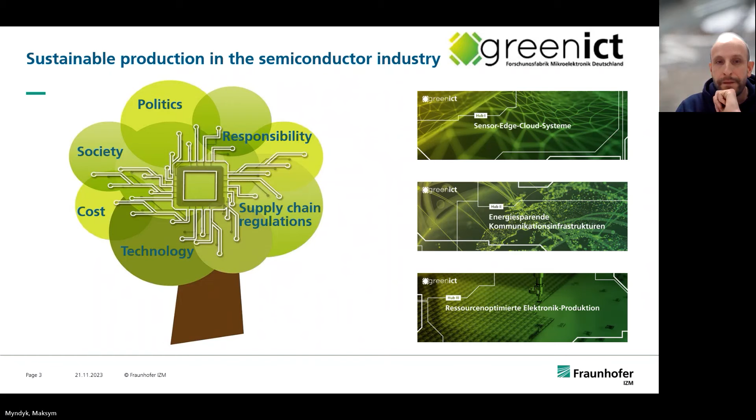And in this project, we started to look at what kind of material we can substitute, what actually means a hazardous material for us. And we reviewed all our processes. I have to mention that I belong to the back-end of line metallization group.

So here we have the plating tools, we have CMP, we have tools for wet etch and strip processes, and one of the processes is cleaning, cleaning of 200 and 300 millimeter wafers. And after this critical look into our processes, we found that one material actually looks very good, but it's not really fulfilling the HSE requirements.

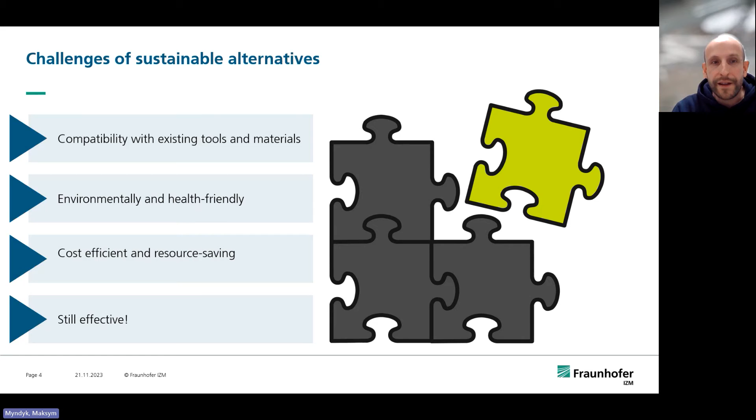And we started to analyze it, and the material that we are using for TSV fluoropolymer removal is called EKC 265 from DuPont. And why is this material not good enough? Actually, it performs very well. It does what it's supposed to do.

But the components or additives used in this material are pretty hazardous and also classified as carcinogenic under REACH. It does not fulfill the sustainability requirements at all. So we decided to find a substitution in this particular case.

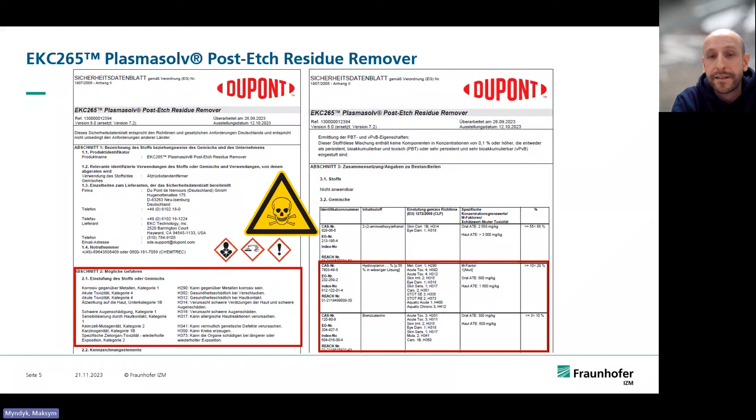And after some research, we connected with different chemical suppliers and vendors. We found a material called D-BOS 390 from Technic France. And they also published some results, but the results they published were done on the coupon level. And we wanted to prove whether this material also performs so well on the wafer level.

By the way, they claimed that the material has a dual function: it could remove positive photoresist, it could also remove the fluoropolymers, and it's also confirmed from the safety point of view. And about the stability, they say about 8 hours, but let's check it.

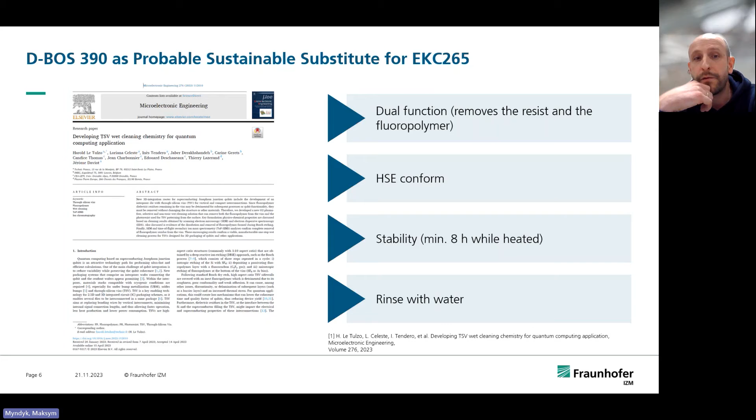And what is also very important, the wafer processed using this material could be directly rinsed by water. And that was a strong argument for us to test it. So far so good. Let's see what the SDS data sheet looks like. We internally reviewed the technical data sheet, and we do not see any hazardous components here in comparison to EKC materials.

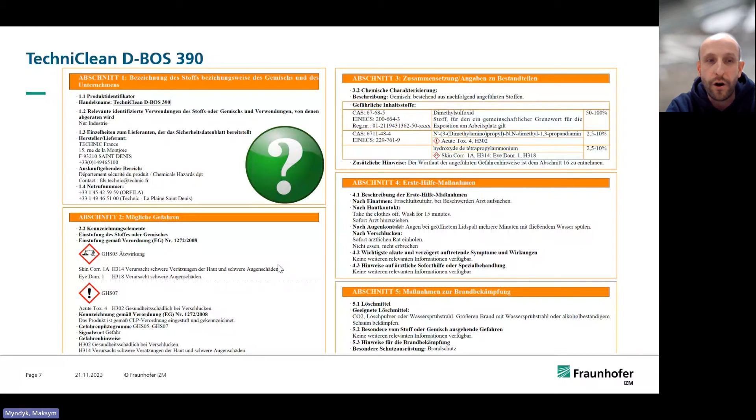But how does this chemistry perform on the wafer level? Could it really remove all the fluoropolymers? These were still open questions. And before we go to the TSVs, let me describe who we are and why we need the TSVs.

ASSID, it's an All Silicon System Integration Dresden Institute. Our core competence is in the packaging. So we are producing the interposer, 2.5D or 3D integration, heterogeneous integration. So we integrate passive and active devices on the interposer. We can work with a wafer, we can work also using the polyimides.

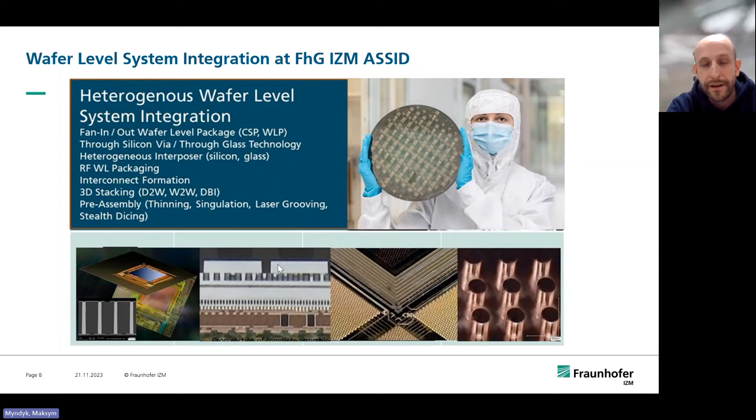But to create an interposer, something important is needed. And this important thing is the interconnections for heterogeneous integrations. And these interconnects, you can see there, these pillars. These are vias or the TSVs etched in the silicon wafer. But to get them, the way is pretty complicated.

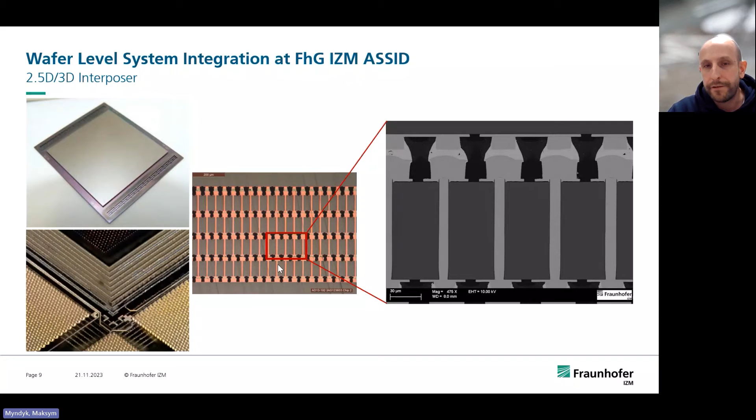To receive them, we need to apply a special approach, so-called plasma etch, and the most widely used is called the Bosch process. And I will very briefly describe what the Bosch process is. Probably all the participants know much better than me, but by the way, in the Bosch process, we have a cycle of 3 very important steps.

In one step, fluoropolymer will be deposited on the walls. After that, the fluoropolymer will be anisotropically etched from the top. And the third step is an isotropic etching of silicon using the SF6 plasma gas. And these cycles repeat all the time. And using this process, it's possible to etch different dimensions or geometries of TSVs.

But after etching of TSVs, the walls of TSVs are covered by this fluoropolymer passivation layer, covering from the top to the bottom. And this layer is there to protect the walls from isotropic etch to get these nicely etched vias. But after etching, the polymers need to be removed. And why do they need to be removed?

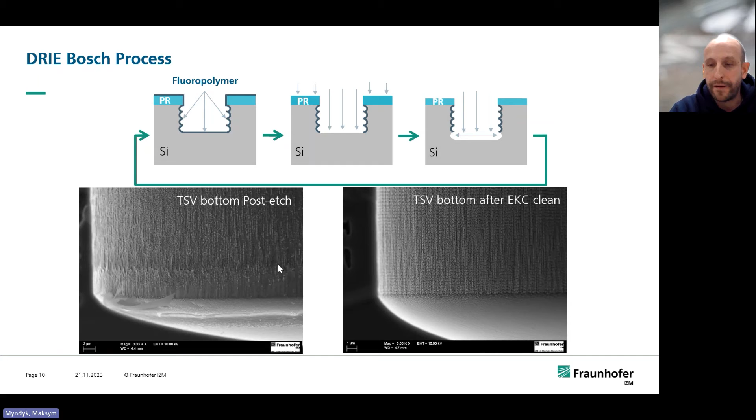First of all, the fluoropolymers have bad adhesion to the silicon surface, and they can peel off anytime. Additionally, when further steps happen, like a silicon dioxide CVD or metal sputter process, the whole system can fall down, so it can delaminate. It could lead to higher thermal stress. It could lead to electrical malfunctioning, failure. So the clear answer is it needs to be completely washed away.

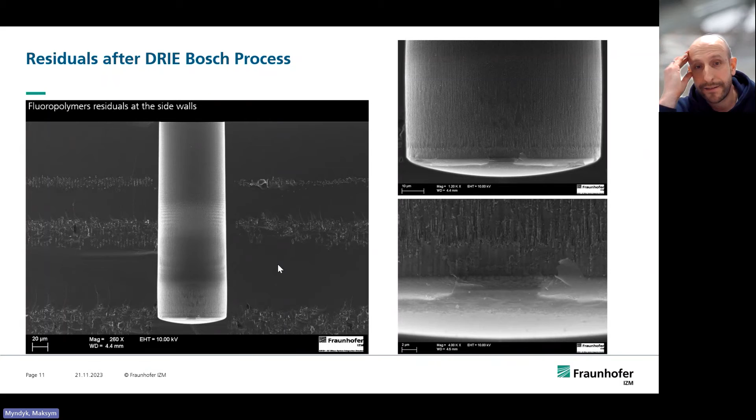And the picture of a not cleaned TSV is very easy to identify. We do not see on the bottom any clear scallops caused by the Bosch process. And everything is covered by the fluoropolymer layer. And how this layer needs to be removed, I will explain in a few minutes.

And this is another example of how the fluoropolymer layer is peeling off from the TSV walls. And on the bottom, there are also a lot of residuals. And for example, if everything is covered by the metal, it could simply just delaminate.

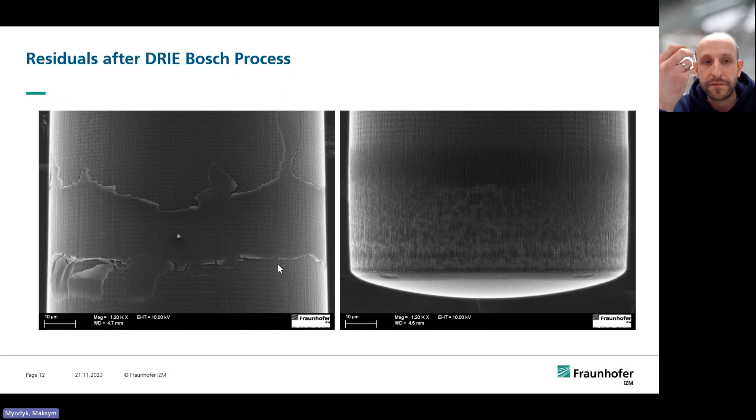For cleaning of TSVs, we are using our existing tool, because the challenge is to find something new, but this something new has to fulfill the requirements. First, we don't want to change anything in the equipment. So we're going to use the same equipment, but we want to change the chemistry.

So here we have the in-house existing SSEC cleaning tool, and basically the cleaning step consists of immersion into the soak station. It takes some time, let's say 35, 36 minutes, and after that the wafer will be rinsed by chemicals again and rinsed by isopropanol, because the water cannot contact EKC directly in this particular case.

And in the third chamber, we will finally rinse by water and use megasonic power energy to remove all the particles, and the wafer will be dried by nitrogen. This is the first method we're going to use in our testing.

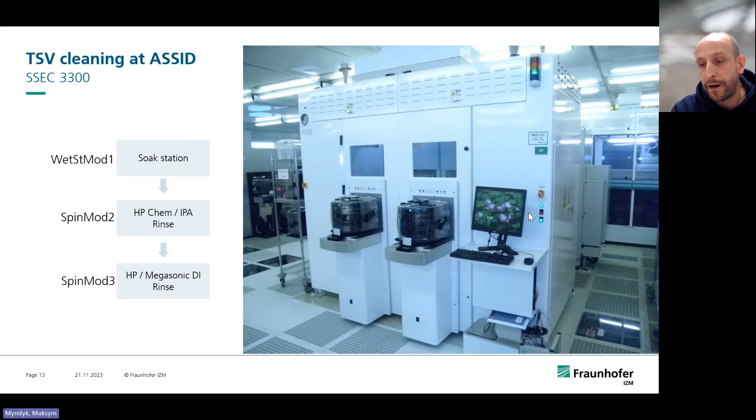Another technology approach is so-called MegPie. And for MegPie, we have contacted an external company. This process is patented. And very briefly, I will describe this. The idea is completely different in comparison to SSEC.

Using this triangle, we will apply megasonic energy into the wafer surface, and the megasonic energy is much higher in comparison to SSEC. But the energy will be transferred through the fluid layer into the wafer surface. And in both cases, SSEC, our existing tool, or MegPie technology, we will use the same chemistry from Technic France, D-BOS 390.

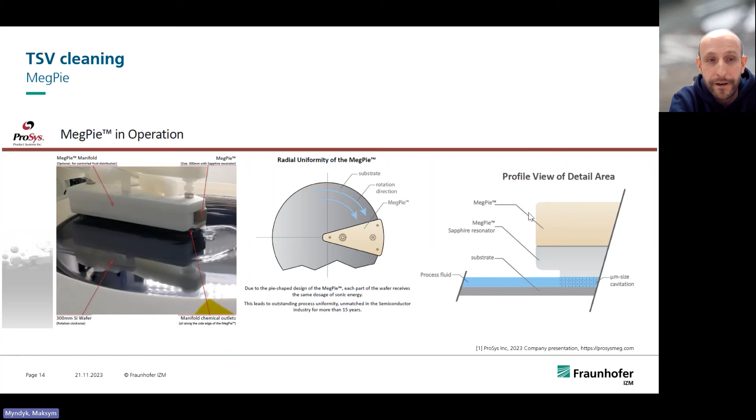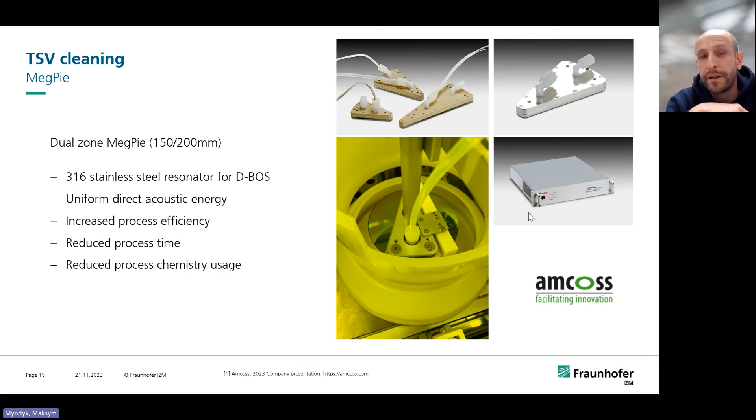The idea of MegPie was realized by, again, an external company. They have built the tools for handling of 200 and 300 millimeter wafers, and all the demos were done by them. They also claim that using this technology, it's possible to reduce the process time and also use lower temperatures. So far, so good, but let me go to the most interesting part, how it actually performs. Does this chemistry work or not?

Here in-house, we have different designs of TSVs, but one very important design is 260 micrometers deep TSVs with 80 micron CD opening. It's a pretty large TSV, and the first results I'm showing here. This is our reference sample. The wafer was cleaned at ASSID using our POR method, and this is an example of how a clean TSV needs to look.

So on the left, we can actually not see much, but the structure of the walls looks pretty clear. But under another magnification, from the middle, we can see very well the scallops created by the Bosch process. So all the fluoropolymer was completely removed in this case. And we have checked the bottom of the TSV, and the bottom looks absolutely clean, and very nicely etched silicon is to be seen.

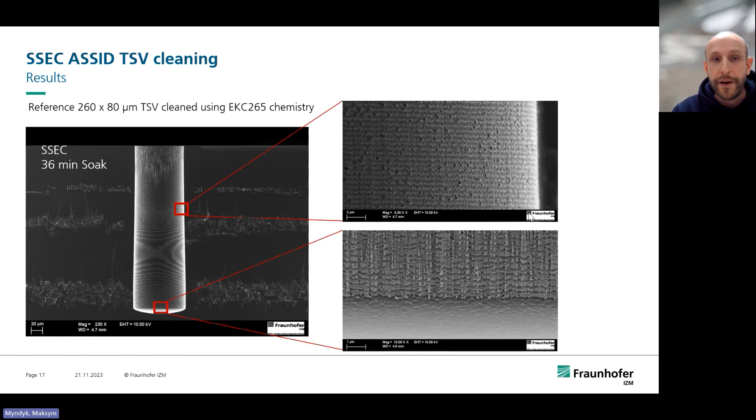So after that, we started to evaluate the D-BOS chemistry. We filled it in our SSEC tool, and in the first test we ran, to be on the safe side, we just doubled the soaking process time, because we weren't sure if the POR would work. And what we see, the TSV actually looks very good. In the middle of the TSVs, there are no visual residuals. The shape of the etched silicon looks good, and on the bottom, no particles, no residuals, absolutely everything was completely washed out.

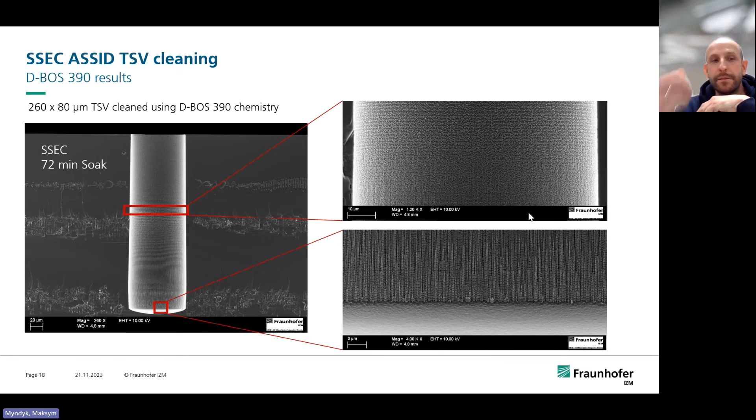So after these successful results, we started to optimize the process and to see what actually happens if we reduce the process time or soak time. We reduced the soak time to the same time as in the case of ASSID, and the results also look very promising. We visually do not see any residuals in the middle of the TSV and on the bottom.

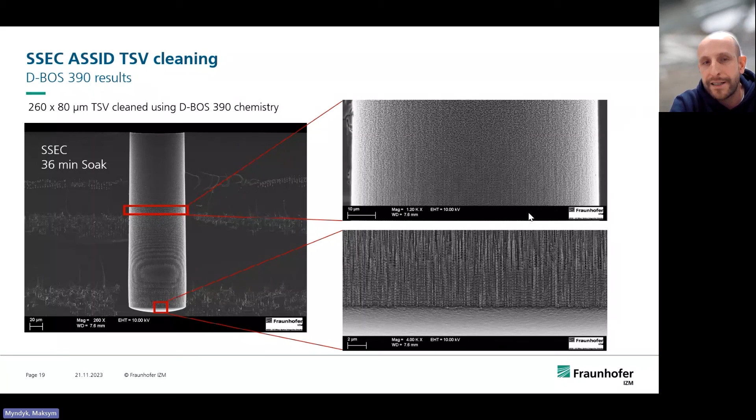I'm showing at the moment only 3 pictures, but a lot of cross-section pictures were done at different places: center, half radius, edge. We have analyzed it completely from the top to the bottom.

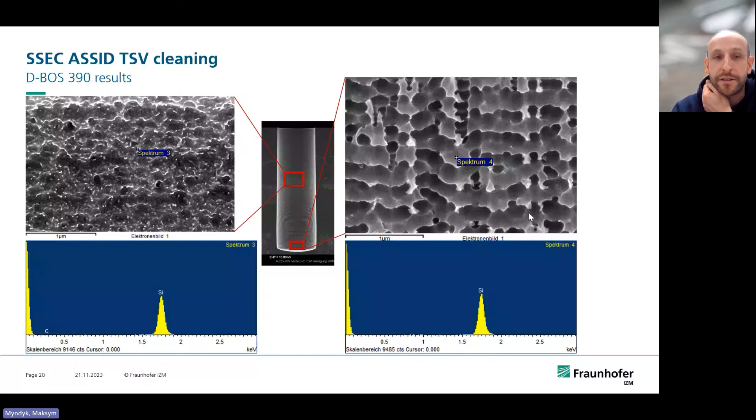But to be definitely sure that the material performs as it needs to perform, we did the EDX analysis on the middle of TSVs and on the bottom. And what we see, there are no carbon-fluor bonds, reflexes, or signals found in this particular case. And the spectrum we see here, the experiment was performed after 36 minutes of process soaking time. So actually, I was surprised that the chemistry looks pretty good.

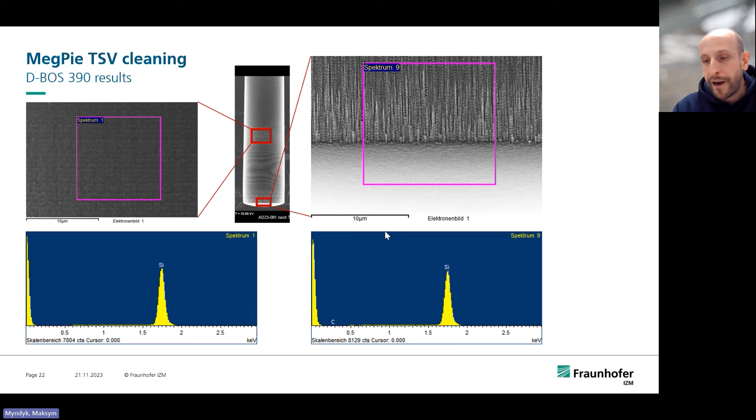We also did the EDX analysis of TSV cleaning by MegPie technology. What do we see here? On the places where no residual is visible, there are no fluor signals at all. So this means that the walls and the bottom of the TSV are really clean. So it was the first try with this chemistry, with the TSV 260 x 80 micrometers. But in-house, we still have other TSV dimensions. And one that we very widely use is the 10:1 critical aspect ratio: a 10 micron opening and 100 microns deep etch.

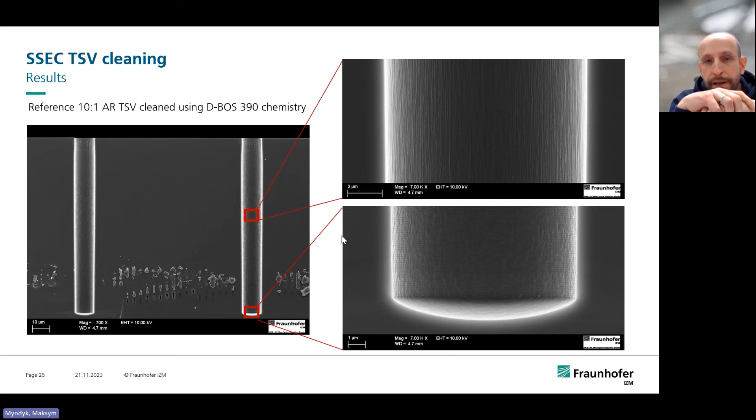Then we changed the chemistry and ran another test. And this test we ran for 36-minute soaking time, so actually the time wasn't doubled. And the results were really good. In the middle of the TSV, no residuals were found. The bottom of the TSV is absolutely clean. But to double check it, we performed the EDX analysis, and it just confirmed our assumption. The fluorpolymer was completely removed from the TSVs, and no residuals were found in this particular case.

To summarize the results, I was actually very surprised to see good results. The MegPie process still needs optimization, but it also offers other positive points like lower temperature and shorter process time. A really very important point is that the wafer processed using the D-BOS could be rinsed by water. And it can also influence the costs, but further evaluation is still ongoing. We need to repeat the results on the same structure, and on a different structure, to see how it behaves.

And actually, this is not the finish. This is just the beginning of our way. But I'm really happy that I could do it with two external companies like Amcos and Process. I was really happy that I got support from the team that I am allowed to work with. And because of Green ICT, they gave us a light push to find a solution, and we will keep working in this direction. All the results that we achieve in the Green ICT project will be published later, and industry companies will receive an offer of what kind of substitutions they can use for their processes, and we will of course give evidence whether it works or not.